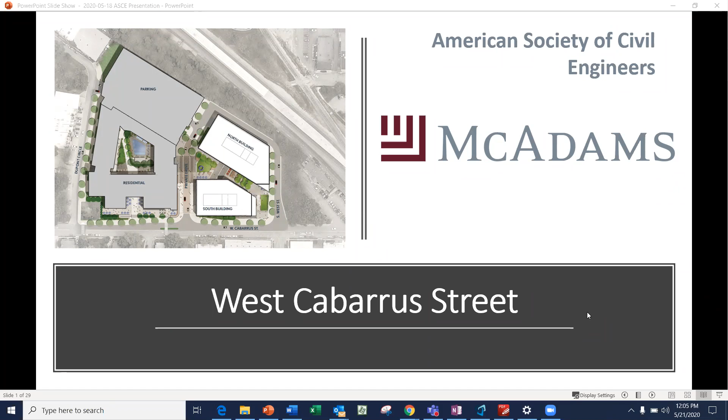So for today, I wanted to present a handful of topics related to the West Cabarrus Street mixed-use development that we're currently kind of finishing up the preliminary site planning efforts on. I want to present to you the history of the site, some contamination issues present on the site. What is the proposed development? What do we plan on constructing on the site?

We ran into some significant storm drainage issues that we had to overcome, and West Street extension coordination, because the city has a planned project to extend West Street underneath the railroad tracks, which is immediately adjacent to the subject site. And then there's some tricky sequencing of construction that I want to touch on, as well as the permitting process that we're navigating through with all the municipalities and agencies that we need to get permits from. And we'll leave time at the end for questions and comments.

So moving on, let me tell you a little bit about where the subject site is. The site is 6.82 acres, so just shy of 7 acres, in 3 parcels. I've highlighted it on the slide, and it's within Raleigh's historic warehouse district, and it is zoned IX-7-UL, so it's up to 7 stories max, industrial mixed use up to 7 stories, as defined by the Raleigh Unified Development Ordinance, which we call the UDO.

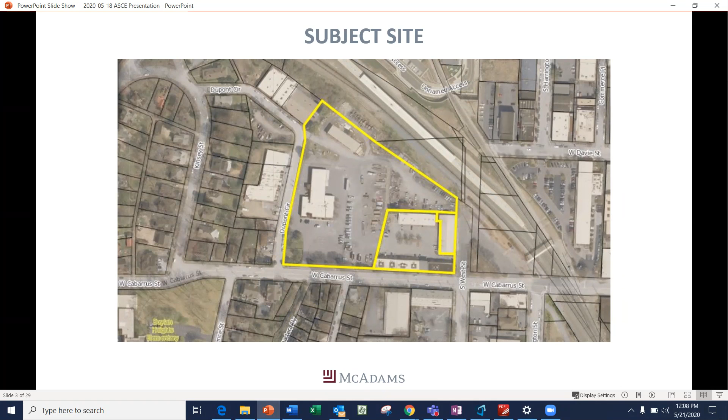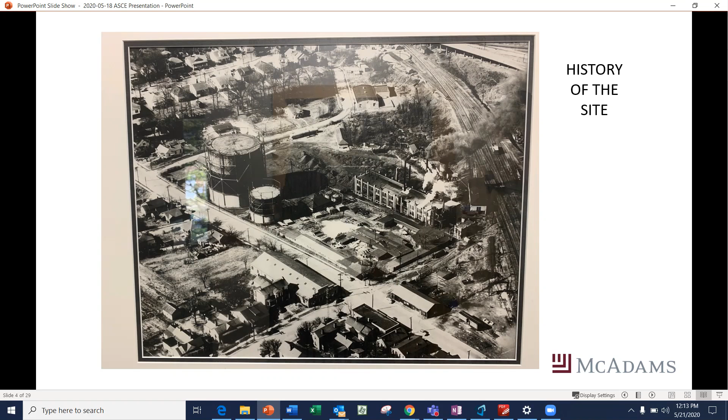Moving on to the contamination that occurred because of that gas plant, the most important environmental matter is that former manufactured gas plant facility and the contamination it caused, primarily on the larger parcel along DuPont and the railroad tracks.

PSNC completely dismantled and demolished the gas plant by 1989. In 2001, they entered into an agreement with the North Carolina Department of Environmental Quality to address the contamination caused by the gas plant's operations for all those decades.

Starting in 2001 and ending in 2011, a 10-year period where PSNC implemented a series of comprehensive, large-scale cleanup actions that included the removal of approximately 38,000 tons of contaminated soil and other response actions. There is, however, some residual pollution below grade in the soil today and in the underlying groundwater at the property, which needs to be considered for our redevelopment.

But for the most part, the worst of it was eliminated from the site and disposed of properly. Because the site was largely cleaned up in that 10-year period from 2001 to 2011, we do not envision major environmental issues that will materially interfere with the site's redevelopment.

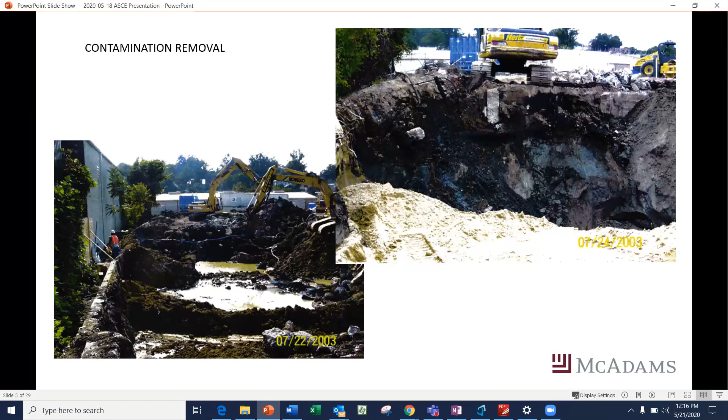One more thing about these gas plants. There were about 25 manufactured gas plants in the state, producing burnable gas by processing coal. There were about 4,000 of these plants in the US that operated for about a 60-year period, from the late 1800s to the mid-1950s.

When natural gas became available in our cities and towns, these gas plants were shut down. They produced such serious pollution conditions here in North Carolina that a dedicated group was set up to work with utility companies on cleanups. Somewhere on the order of $25 million was spent cleaning up the plant on this particular site.

So let me introduce you to the proposed development concept. The owner and architect are still in the preliminary stages of design for the buildings themselves, but the engineering aspects of the site-related items I'll discuss today remain the same, independent of what the final building design will ultimately look like.

The slide on the screen illustrates very conceptually the proposed development, which consists of 2 office buildings, an apartment building, and a parking deck to serve both uses. There will also likely be a retail or restaurant component on the first floor of some or all of the buildings.

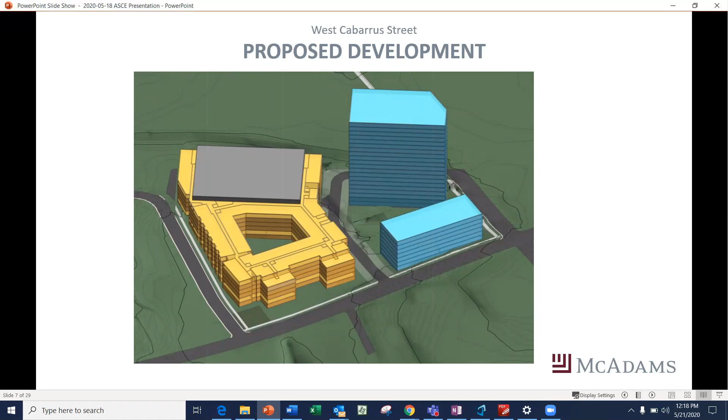This is a 3D illustration, just to give you a feel for generally how the project may look in the future.

The uses are laid out on the site this way on purpose. The idea is the office buildings are on the side of the site that face downtown. On this illustration, downtown is northeast and east of the site, with north straight up. We want the office buildings facing downtown where there's more urban density, and the apartments on the western side facing predominantly residential neighborhoods beyond.

Likely the offices will be taller than the apartments, so the height transitions from the urban northeast area to the more residential southwest area of the site. The building placement and scope were by design, on purpose, to fit into the fabric of the overall development in the area.

Both offices and apartments share the parking deck, and the deck is specifically connected to the apartment building so residents can have quick access to their units without walking outside. That's highly desirable for those renting an apartment. The office tenants will need to cross a private street in the middle, between the offices and the residential building, to get to the deck.

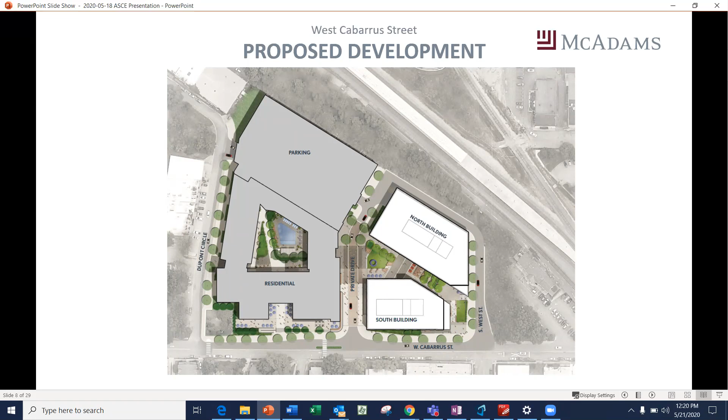The goal is meeting the City of Raleigh Unified Development Ordinance, or UDO, to really activate the street with street trees along back of curb, nice wide urban sidewalks, opportunities for seating, trash cans, and bike racks, and a lot of entrances out onto the street, such that it really becomes not a dead space, but a very active and lively space.

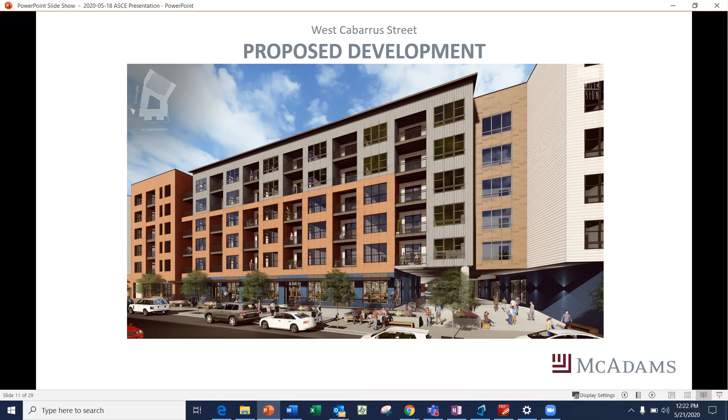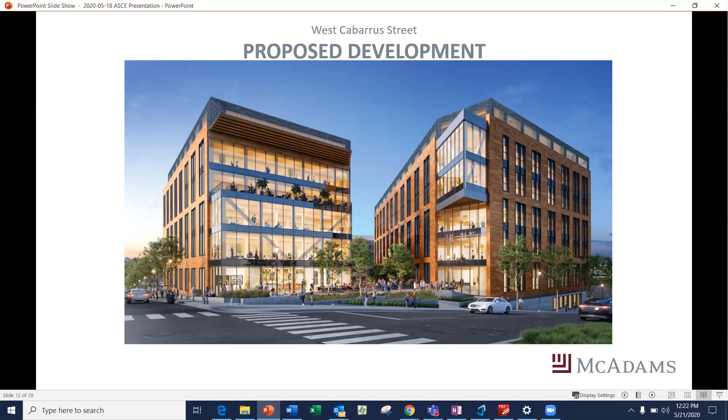So some of the things from a civil engineering standpoint, now that I've gone over the history of the site and introduced you to what the final product may look like, what we're trying to achieve - we ran into some very specific site-related issues that I'll spend a bulk of my time talking about, and of course be able to address any questions you have at the end.

One of the main issues was related to storm drainage. There is an existing 5x5 box culvert that runs from the northern property line at the North Carolina Railroad, extending south through the site to the south side of Cabarrus Street.

The box culvert itself is not in good condition. It is also grossly undersized for the drainage area that we're taking on. In addition, there's a known flooding condition on the north side of the railroad tracks at Union Station.

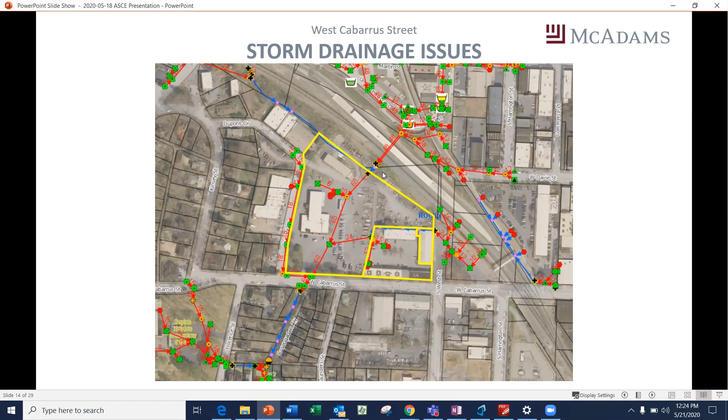But we're trying to solve 2 things. We're trying to get the stormwater through our project and size the new culvert appropriately, and we're also trying to solve an issue that's on the north side of the tracks.

So we had a handful of iterations to eventually get to where we are today. I'll walk you through a couple steps that we took in order to get to this point where we believe we have a solid solution.

They just dump it out into a riprap area right now before it goes into the 5x5 box culvert that exists today. So those pipes really are the problem in why Union Station floods, because they need to be much, much bigger. In fact, instead of twin 48-inch pipes, they really need to be twin 72-inch pipes. That's quite a big difference.

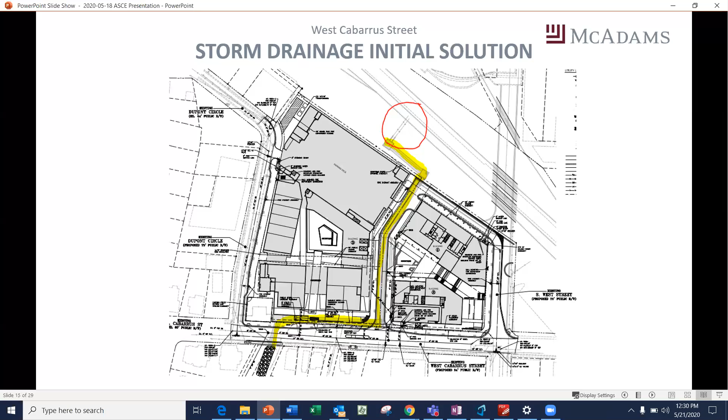And then the next slide I'm presenting here shows our first reaction to mainly an alternative to having large junction boxes and dual 72-inch storm pipes within the NCRR right-of-way. They were opposed to that, so our way around it was we collectively worked with the railroad staff to design an alternative that included a riprap lined plunge pool at the outlet of the dual 48-inch pipes at the railroad tracks. And I circled that in red on the slide, and that's not very different than the existing condition, because in the existing condition, the stormwater comes out of the twin 48s, dumps into a riprap plunge pool, and then it enters the 5x5 box culvert at our property line.

So we would basically be doing about the same thing, and we would extend that riprap to the east to marry up with a headwall, which would be the entrance to our new box culvert through our private street. So if all that was lined in riprap and properly sized, and the depth of the channel was deep enough, it was reasonable to the railroad for that solution to move forward.

However, at a subsequent meeting, and then when we really started studying that design and realizing that we really couldn't get the depth of the channel to be enough to accommodate the 100-year storm with some serious safety factor built on top of it, we ourselves became uncomfortable with doing this as a strategy either, considering we have a brand new parking deck sitting right adjacent to this place where we want stormwater to make a hard turn.

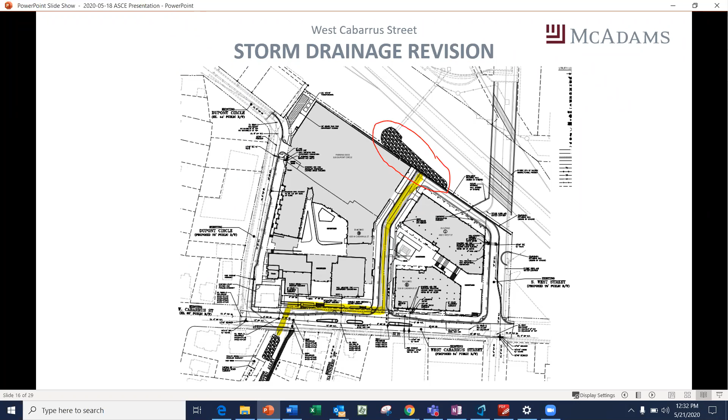We propose to bore and jack dual 72-inch steel pipes underneath the railroad tracks. And so recall that there's dual 48-inch pipes in the existing condition. So the new pipes will be absolutely increased capacity enough on purpose to alleviate the flooding condition at Union Station to the north. So that was the big win there. It comes with a cost of an expensive boring and jacking operation, but it was a necessary thing in order to fix the flooding issue at Union Station.

Also, the railroad gave us some relief in allowing a skewed crossing of our new pipes at the railroad tracks. A typical standard for the railroad is they want any crossing of storm pipes to be certainly perpendicular. And so for them to give us some relief to allow us to skew it, that was a big win, because it enabled our new twin 72s coming under the tracks to align with our private street, and it eliminated a couple of those 90-degree bends that we were all concerned about.

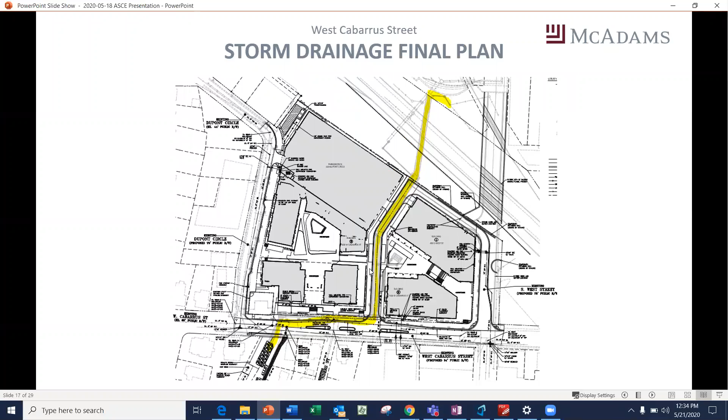However, when we start going a little further downstream, at the next junction box, we would change it to a box culvert that is taller and narrower, something that's more standard and more readily available than the 12 foot by 5 foot. So we're preliminarily working with the contractor to value engineer that, but it looks like an 8 by 8 or a 10 by 6 would be more readily available and a little cheaper. We definitely don't have as much of a cover issue in the vicinity of West Cabarrus Street than we do further up closer to the railroad tracks. So this size change became logical.

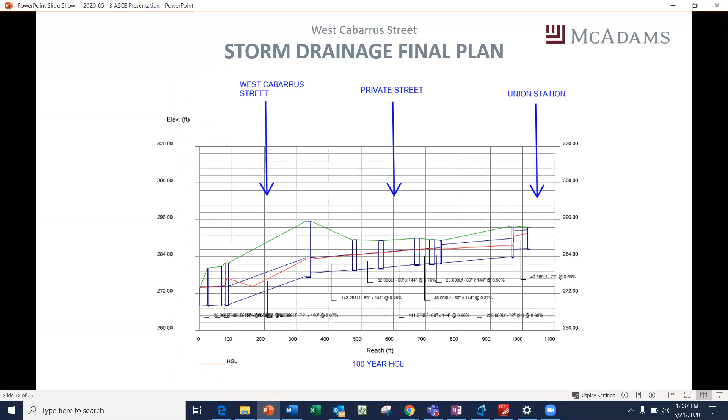So basically that solved the storm drainage issue for Union Station. It was a design that is in a preliminary manner approvable by the railroad and the city. And at this point in time, we're getting ready to move on to more of a final design, construction drawing plan set over the course of the summer. We'll be working on that and getting that submitted to the appropriate agencies for approval. But it took a lot of communication and meetings and coordination with the railroad and the city to get to that point. And we feel very happy and lucky that we're able to satisfy all parties and everybody's comfortable.

So another significant issue that we had to overcome on this project is how to manage the West Street extension, which will be a city project in the future. And so when Union Station was constructed, West Street was extended to the railroad tracks.

So this is looking south on West Street. You can see a concrete wall with obvious indications that the road will ultimately go straight under the railroad tracks. And right around the corner as you enter Union Station is where the flooding issue occurs. That low point in there is where it gets to be a couple feet deep of water during the big major storms. But ultimately, the city's plan is for West Street to go straight under the railroad tracks.

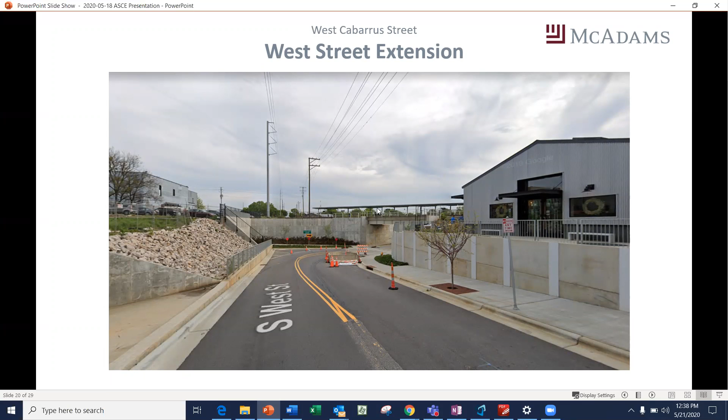So what we're trying to achieve is our project will construct the City of Raleigh UDO, Unified Development Ordinance, required street section for West Street up to the southern railroad right-of-way, which is the shared property line for the West Cabarrus Street project. So on the profile, I tried to identify this location with the green arrow. You can see that that's about where the railroad right-of-way is, and that's where our project property line ends and the railroad begins. First of all, the UDO only requires us to construct the street section on our frontage and only up to the center line. So we are required to improve our half of the street.

So the additional complexity with this project is that the ultimate grade of the center line needs to follow the proposed design by the City Transportation Department in cooperation with the railroad to extend West Street under the 4 sets of tracks using a series of bridges. So we had to receive this information from the city, what their ultimate design looked like, and then build our half of West Street, and our project is highlighted with red, both in plan view and in profile. We have to cut West Street down and dead end it, just like they do on the north side. So in the future, the city project can take it from there and connect the dots between the two.

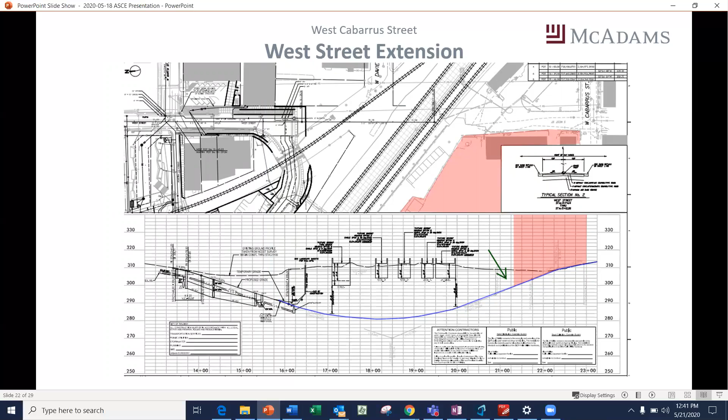So this next slide is looking at West Street across the frontage of our office buildings. I specifically put it in here because you can see how much the road is going downhill, with West Street going down to the right. And we start to reveal like a basement condition on that office building to do so.

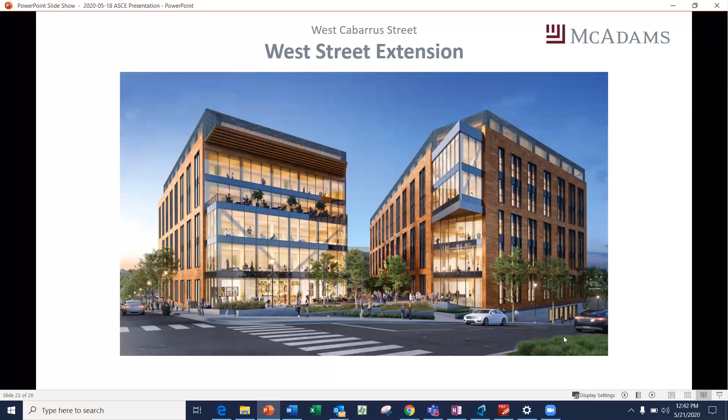So next I want to touch on, watching my time here because it's going by quick, the sequence of construction, which has some complexities that we started the preliminary planning for. I want to just briefly touch on a couple of those, and then I'll finish with highlighting what our permitting timeline looks like before the question session can commence. So the goal for every project is to do enough site work to establish the building pad and get the vertical construction of the buildings underway as quickly as possible.

So in this case, the installation of the box culvert through the site is certainly on the critical path, along with the demolition of the existing buildings. Furthermore, the box culvert would need to be installed from the outlet, which is at the bottom south of Cabarrus, working upstream towards the railroad tracks.

So once the buildings are removed, sediment basins and silt fence and diversion ditches, et cetera, will be needed to control sediment runoff from the disturbed areas. What we envision are 2 sediment basins located as shown on the slide, out of the path of the culvert installation and outside of the footprint for the first office building and the parking deck. So they would build office building number 1 and the deck first out of all buildings after the storm box culvert is installed.

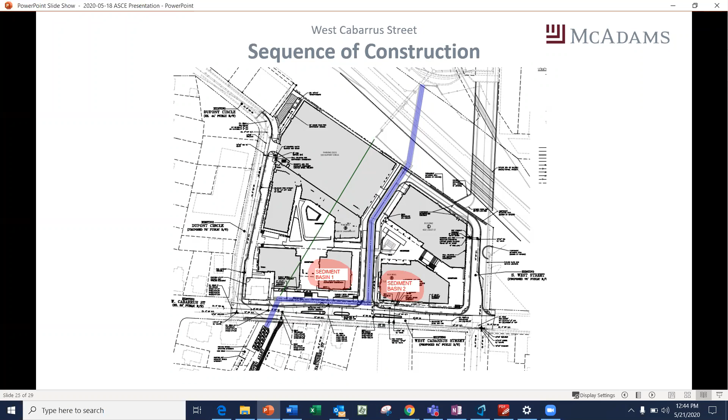This next slide shows the work along West Cabarrus Street. It will absolutely be disruptive, and there's really no way around it. The slide shows storm drainage in green, sewer in red, water in blue, and the gas line in yellow. There's a significant gas farm, a remnant from PSNC, in the corner of DuPont and West Cabarrus that happens to have an 8-inch gas line coming out of it. So you've got to be very mindful of that.

So the box culvert will be installed first, and the goal is to come in right behind it with the sewer, water, and gas in West Cabarrus Street right away. Between traffic control, pedestrian detours, and service interruptions, this work will be carefully choreographed to minimize how long services and access are down.

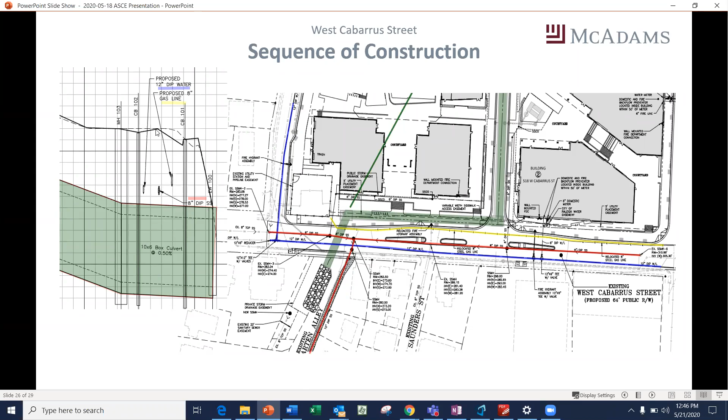But you can see on the profile on the left side of the slide that the significant box culvert would have to go in first and these other utilities go above it. The sewer just wouldn't drain out if it was below the box culvert because it'd be too deep. And water and gas can go above it because there's enough cover between the surface of West Cabarrus Street and the utility.

So in the remaining time, I wanted to at least touch on the permitting process so you had a feel for what that looks like. I may have to hurry through this a little bit to leave some time for questions, but the permitting process and associated timeline are critically important to developers as they structure deals. We spend a lot of time forecasting how long the permitting steps take, what level of design is needed for each step, and what items we need from all the other consultants, architect, mechanical, electrical, plumbing, et cetera, at each point in time.

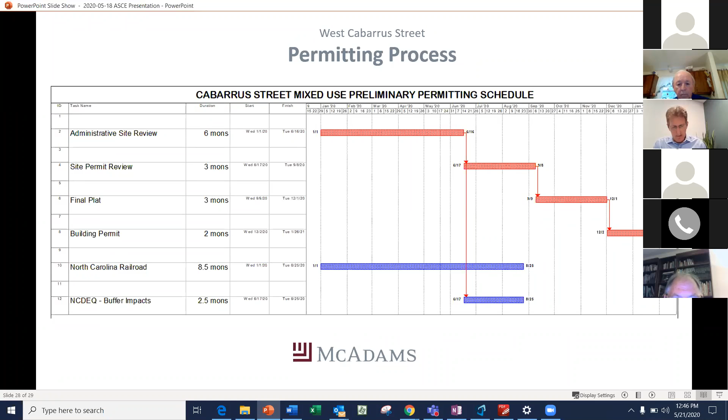So I boiled down the permitting process into 6 basic steps for the purposes of this presentation. The city processes are in sequence with each other, meaning that no overlap opportunities exist to do steps concurrently. The first step is the administrative site review, ASR, as Raleigh calls it. During this time, there could be anywhere between 3 and 6 or more reviews to get all the plans and calculations revised and all city comments addressed before they can be approved by the city staff.

The goal is to obtain preliminary approval for the project, which is an entitlement to the number of units, square footage of office, retail, et cetera, that we're allowed to build on the site. And we need to demonstrate how the proposed development can be served by public utilities and how we're proposing to manage stormwater.

We identify public improvements, street improvements that are required to serve the development. And by the time the ASR gets approved, we know we can move forward to final permitting and that the project can be built. So it's a big milestone.

The next step is the site permit review, also we call SPR is the acronym. So the SPR is where we provide detailed construction drawings for every aspect of the project. We usually use the ASR as like a base, and we add in the plan profiles, cross sections, construction details, 1 million detailed spot elevations, all kinds of calc books, and everything, final design of the stormwater management, et cetera, to basically triple the size of that ASR set to become the final SPR or construction set.

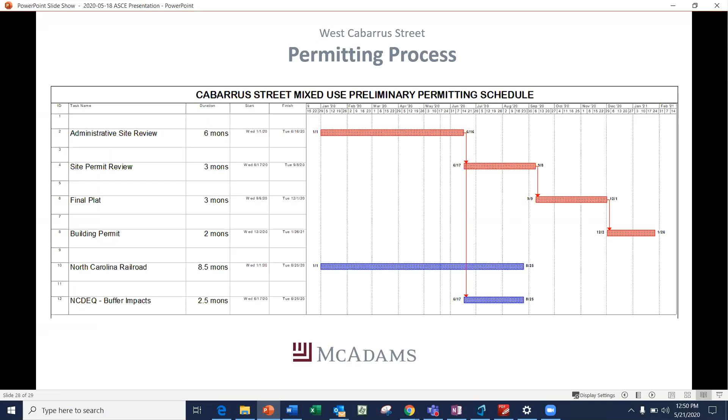So let me conclude here by saying I believe this project will transform that corner of the city by getting the best and highest use of the property. The quality of the project will be high in terms of initial construction quality, how it's maintained and operated for the long term, and really the thoughtful design that is going into it. The ultimate connection of West Street in the future will make West Street a significant southern gateway into downtown.

It would also allow an at-grade crossing of Cabarrus Street and the railroad to close, because right now Cabarrus runs across like four sets of train tracks, and in the future when West Street extends, they're going to close that, so they won't do that anymore. And so it'll be just a safer condition for vehicular and pedestrian safety and the general public. But we're happy here at McAdams to be connected with Kane and Clancy and Theys on this important project as we move into the next phases of design and permitting.

You know, at this point, we estimate construction start to be somewhere in 2021, depending on how the economy fares in this crazy pandemic that we're dealing with. But I just want to conclude to say thank you for your time and the opportunity to present this project. And I will now take some time to address your questions.